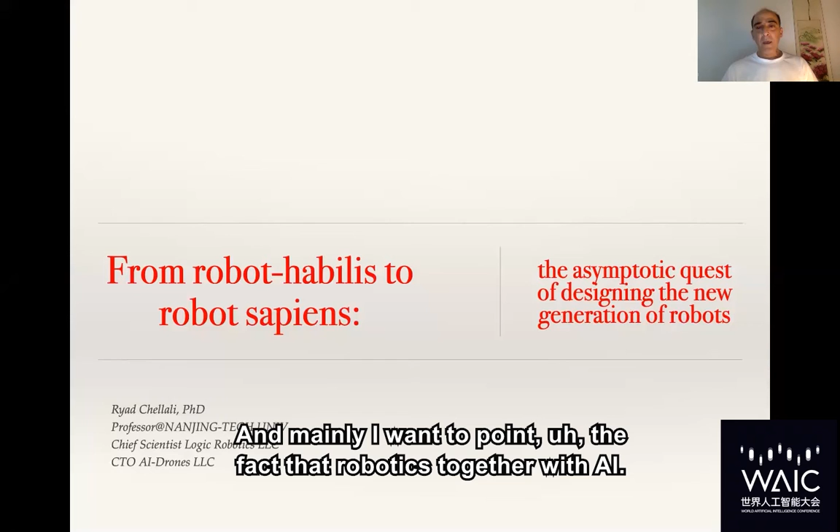Dear friends, I'm happy to be here with you, even through video. I want to share with you some ideas about robotics and AI, and mainly I want to point the fact that

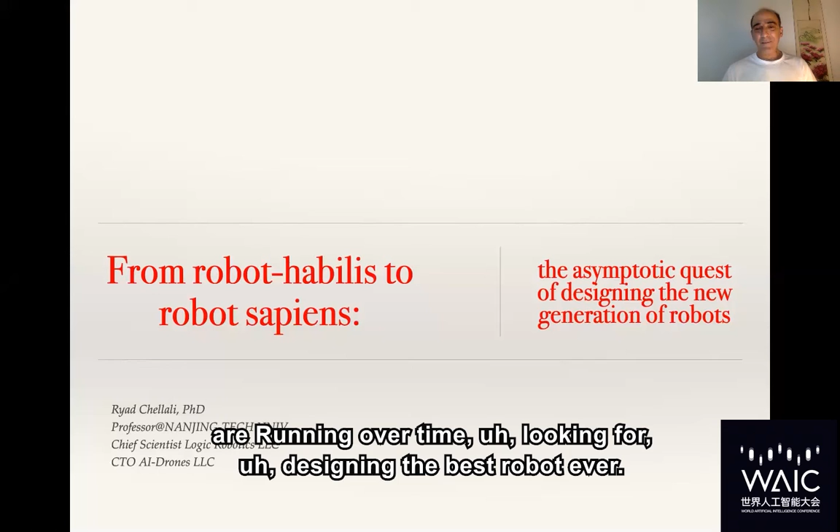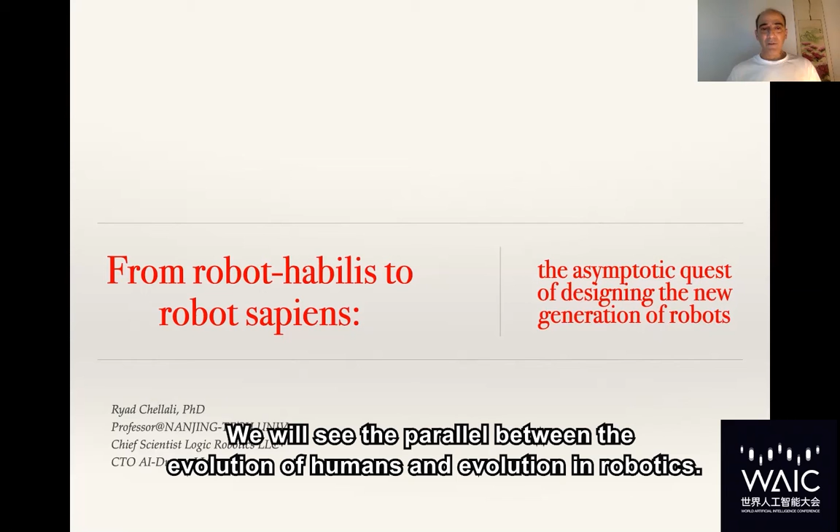robotics together with AI are running over time, looking for designing the best robot ever. And I entitled my speech from Robot-Habilis to Robot-Sapiens, and we will see the parallel between the evolution of robotics with the evolution of humans.

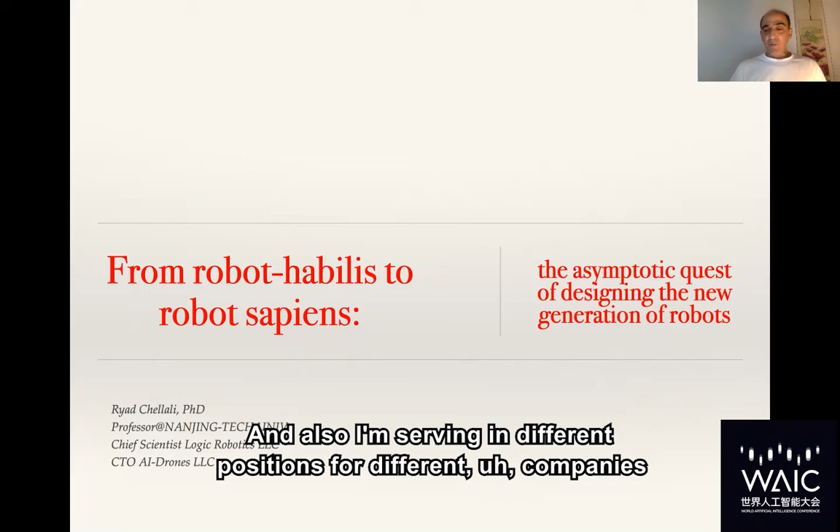My name is Ryad Chellali. I'm professor at Nanjing Tech University, and also I'm serving in different positions for different companies in China, all of them dealing with robotics and autonomous systems.

Robotics, or in other disciplines, we call this the anthropomorphism. So this is actually the quest of many roboticists. But this quest follows a very simple and basic mathematical rule or quantity called the asymptote.

The asymptote fascinated me since my young age and my first studies in mathematics combined with physics. Actually, for mathematicians, if you try to cross a street according to a series of the inverse of power 2, mathematically you never reach the other side of the street. You just cross the half, half of the half, half of the half, etc.

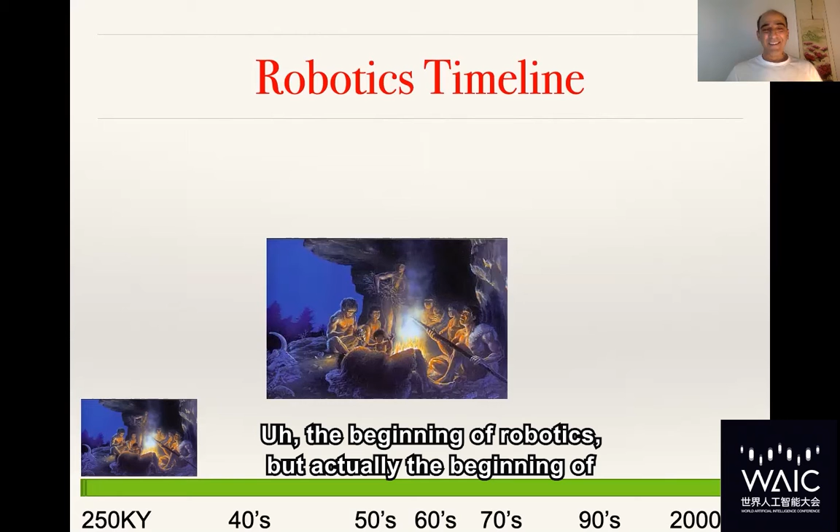If we try to follow the timeline of robotics, we will see that we are crossing indeed the street piece by piece. For me, robotics is actually the capability for humans to create a tool to do some tasks, and this is the very definition of Homo habilis. It means that the hominin, when they started creating tools, typically shaping stones to eat, that is, let's say, the beginning of robotics.

But actually, the real beginning of robotics is around the 40s, when in the US, Mr. Goertz, one of the engineers in Los Alamos in charge of putting together the atomic bomb, created a system allowing remote operation and manipulation of hazardous nuclear products. The system was very simple, purely mechanical, transmitting the movements of the operator's arm up to 3-4 meters away.

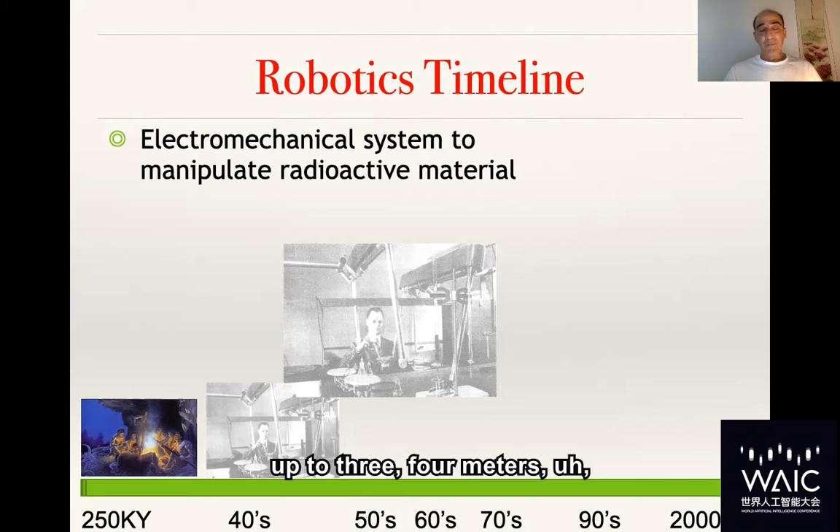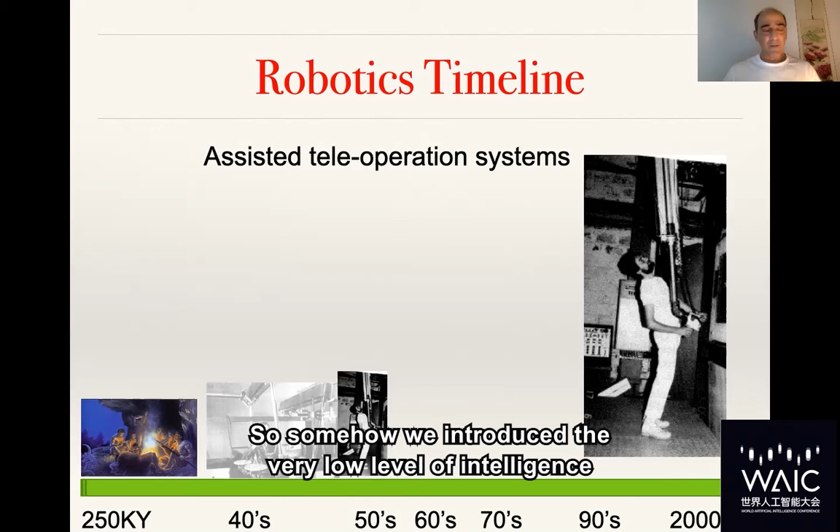In the 70s, the same system was improved by introducing external energy, so the operator no longer used muscles as the source of energy, but instead electrical motors, injecting electricity into the system as energy. More than that, some controls were introduced to ease the work of the operator. So somehow we introduced a very low level of intelligence to help the operator do manipulation tasks.

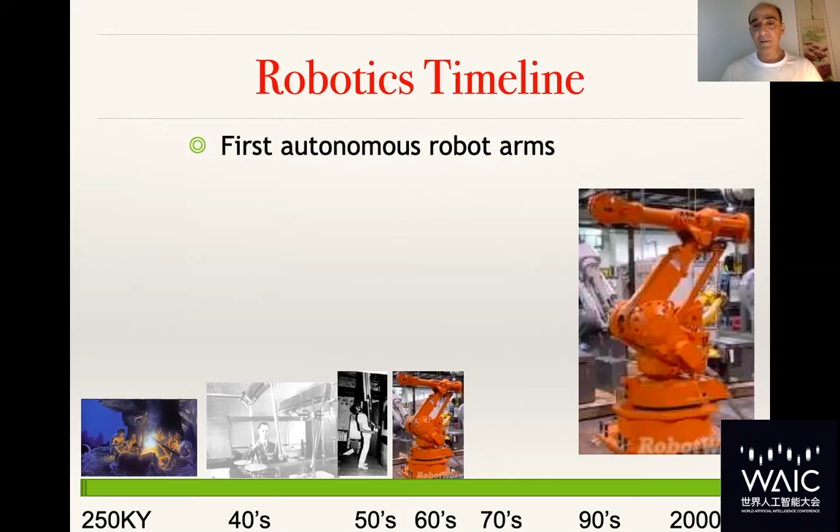If we consider the same system and remove the operator from the loop, we have the robot arm. The robot arm is exactly the derivation of the teleoperated robot we saw before. We have the same concepts, energy and low-level controls, mainly for pick-and-place tasks.

In the 70s in Stanford, the robotics team created the first mobile robot called Shakey. At that time, it was not dedicated to autonomous driving, but was used as a test bed for AI theory of that time. The idea behind it was to implement algorithms allowing the system to move autonomously by avoiding obstacles and reaching a goal, whatever the environment.

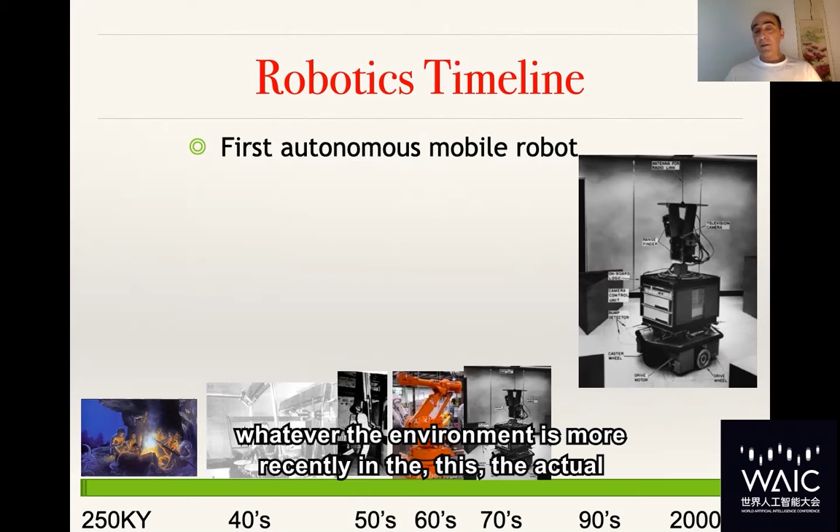More recently, in the actual trend, we are getting closer to anthropomorphism by creating what we call humanoid robots, that are somehow anthropomorphed by their biomechanical structure with arms, legs, head, neck, etc. So this is the actual trend, and the best machines these days are humanoids, and we will see why humanoids are a key point, even if we don't meet humanoids in our daily life.

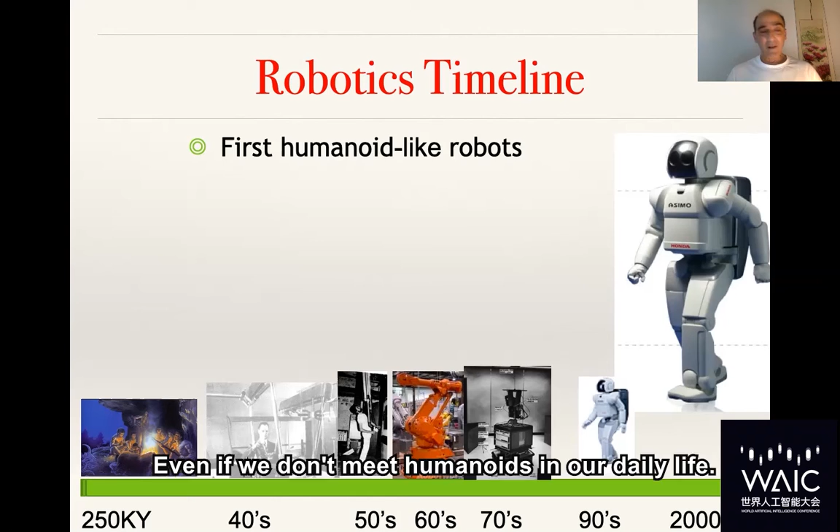So the role of robotics, and indeed the quest of Ishiguro and many others, is to create a machine that is similar to us — meaning that the machine thinks as us, looks as us, and more importantly, acts and reacts as humans.

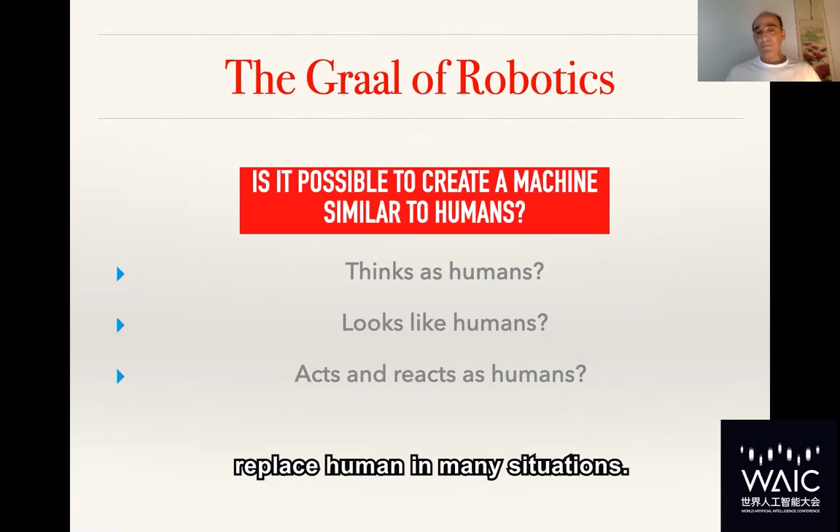This target is actually the holy grail, because if we have a machine that can do this kind of tasks, it can replace humans in many situations.

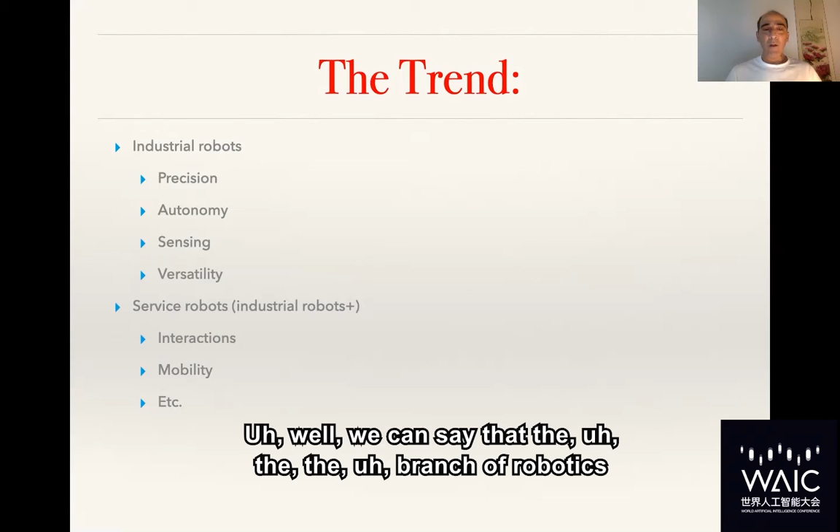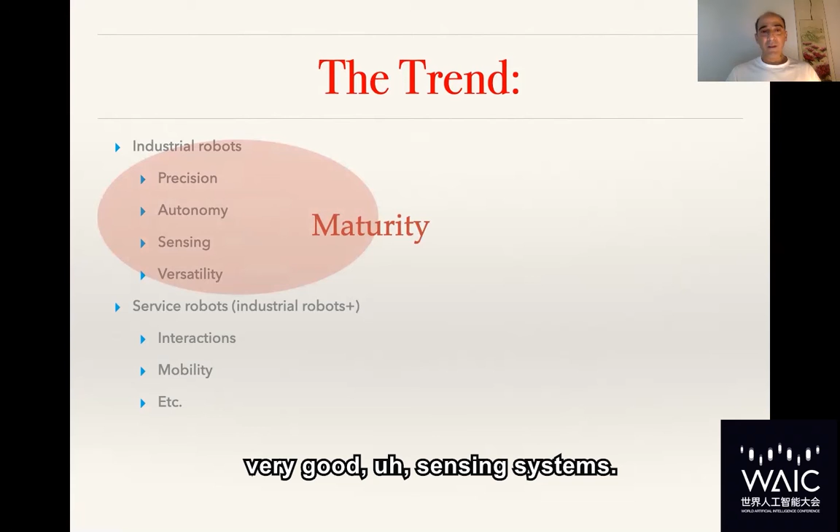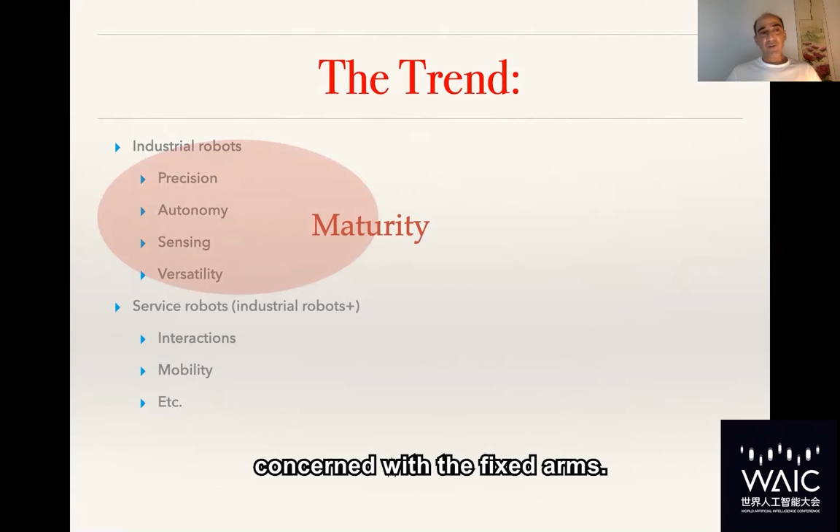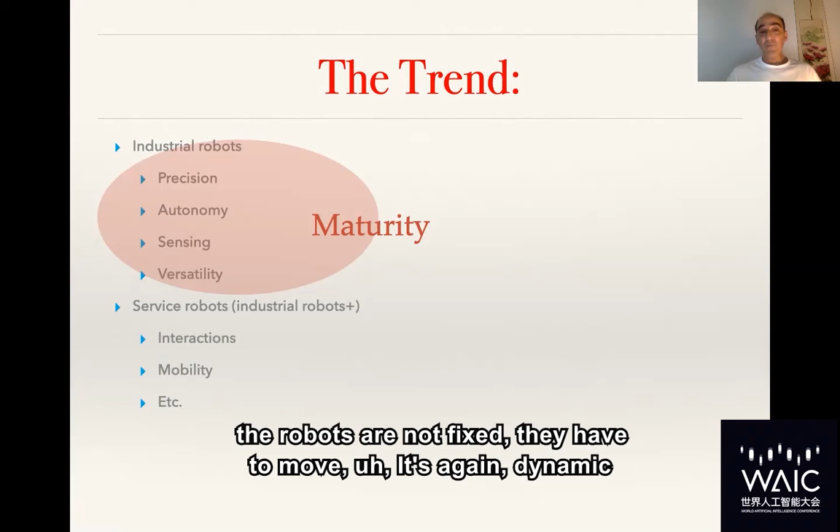Including acting, having very good sensing systems, adapting to environment change, etc. But we have to keep in mind that this branch is concerned with fixed arms. If we consider the other branch, service robotics, where robots are not fixed but have to move in dynamic and versatile environments, here we are still working on it. There's still a lot to do.

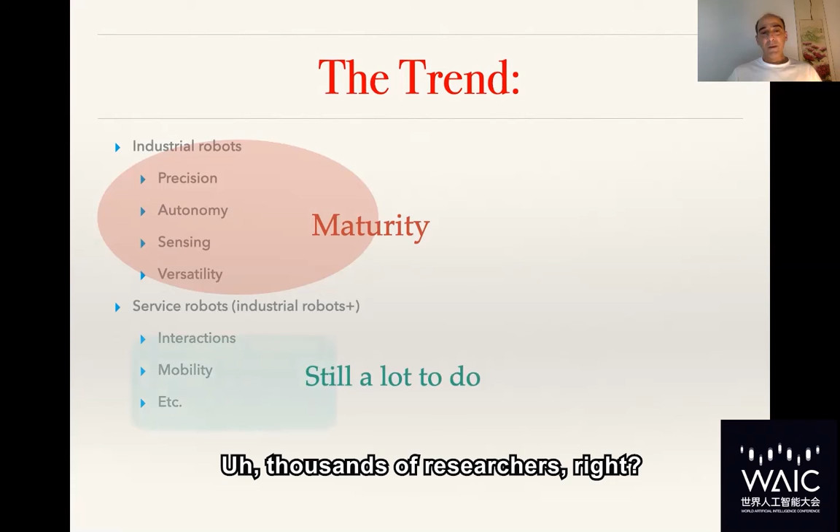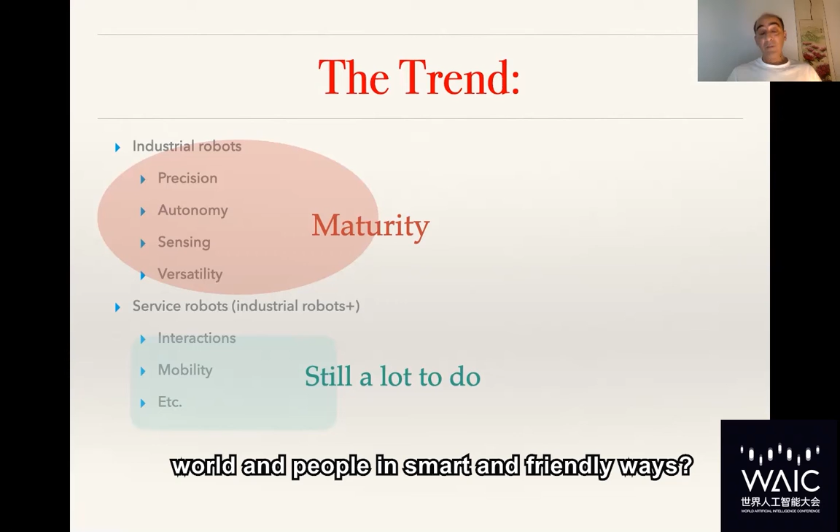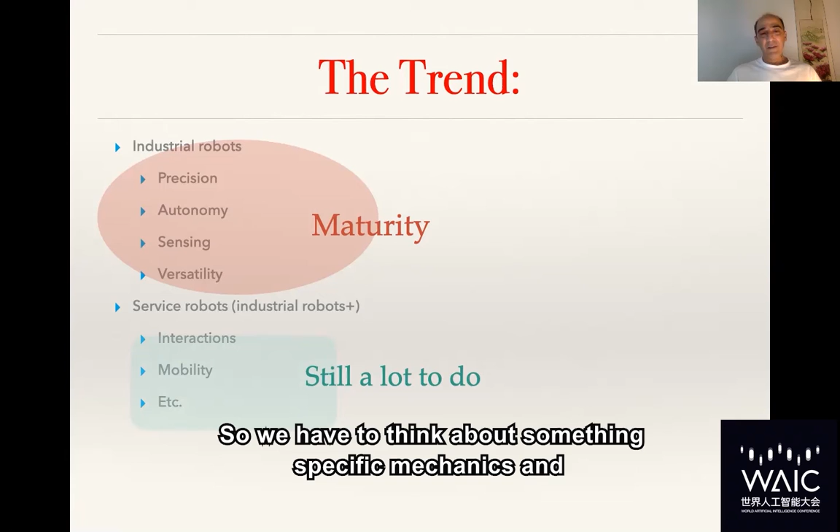The key issues thousands of researchers worldwide are addressing deal with interactions: how can the robot interact with the world and with people in a smart and friendly way. We still have some mobility problems, so we cannot send our robots into every environment. We have to think about specific mechanics or mechatronics in general to be able to send robots everywhere. These are the two main categories of issues we still have to address.

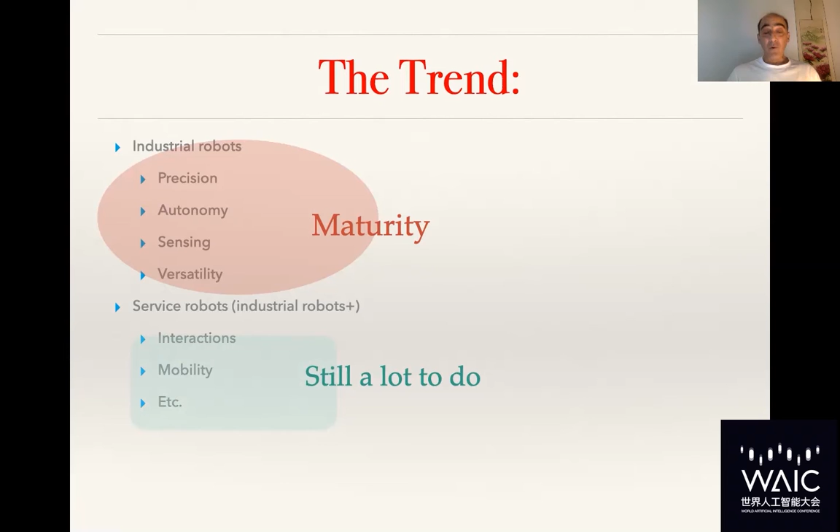Okay, let's take it in a very visual way. This is what a human can do, actually.

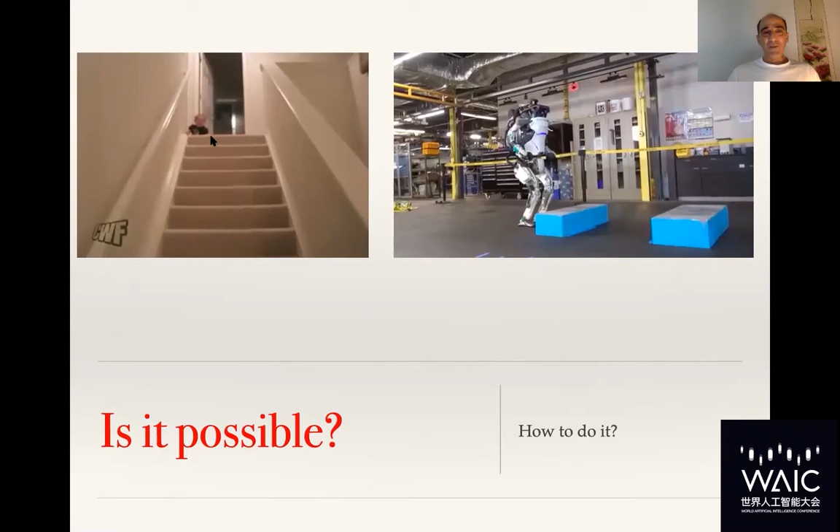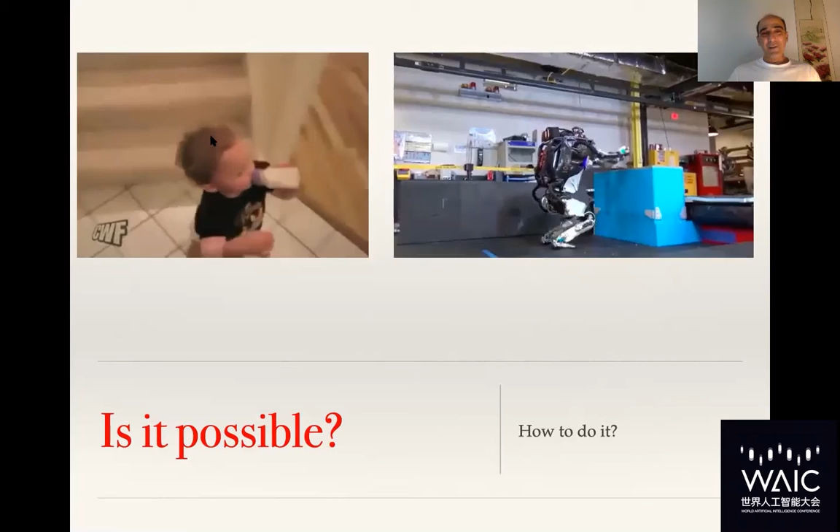If we consider the left video, we have a baby. He invented a new way to go downstairs to get his milk. Nobody taught him how to do it.

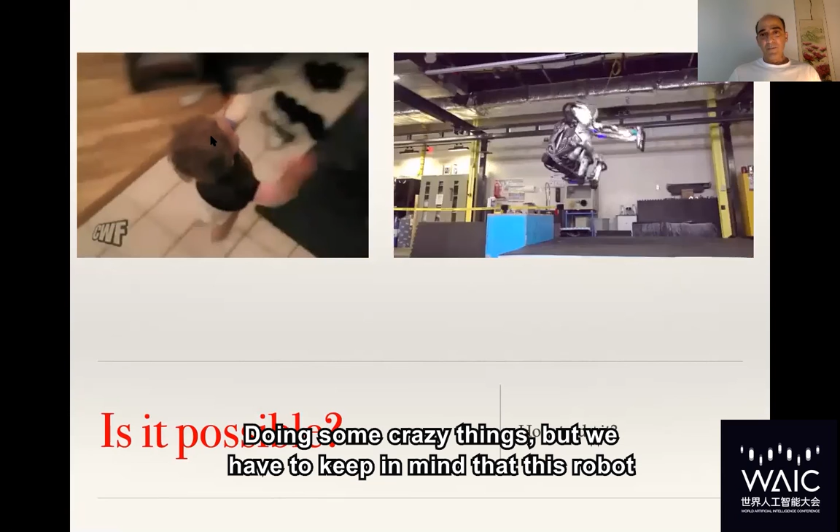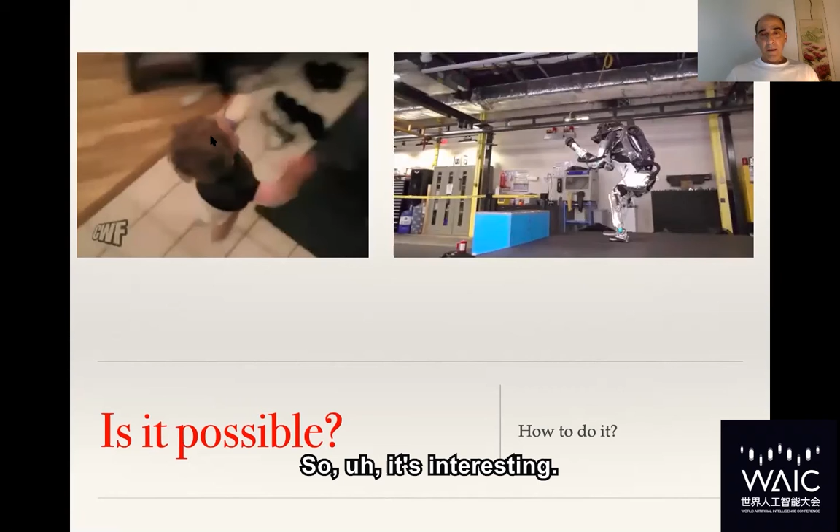On the right side, we have the state of the art in terms of anthropomorphic robots doing some crazy things, but we have to keep in mind that this robot needed tens or hundreds of millions of dollars, and hundreds of people working for more than 10 years to reach this. So yes, it's impressive, but still you can see that there's a lot to do.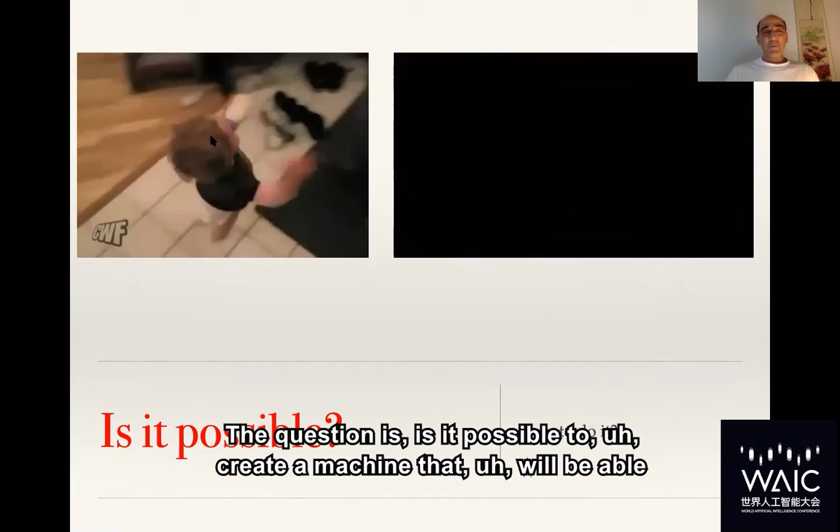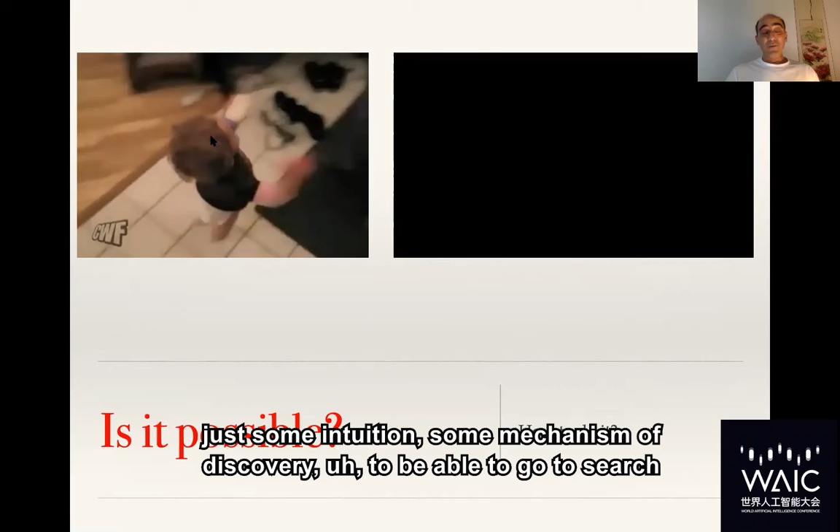The question is: is it possible to create a machine that will be able to do like the baby? Meaning, without any high-level knowledge, just some intuition, some mechanism of discovery, to be able to go search for a power plug to recharge the batteries. Is it possible? And if yes, how to do it?

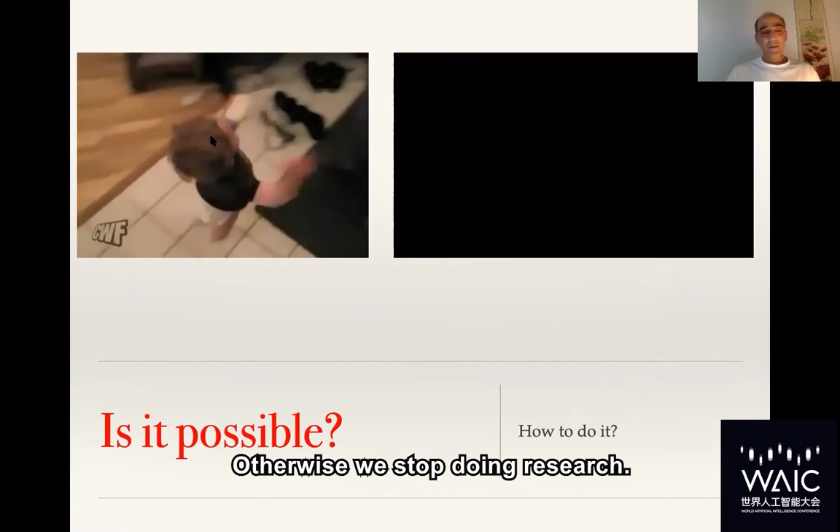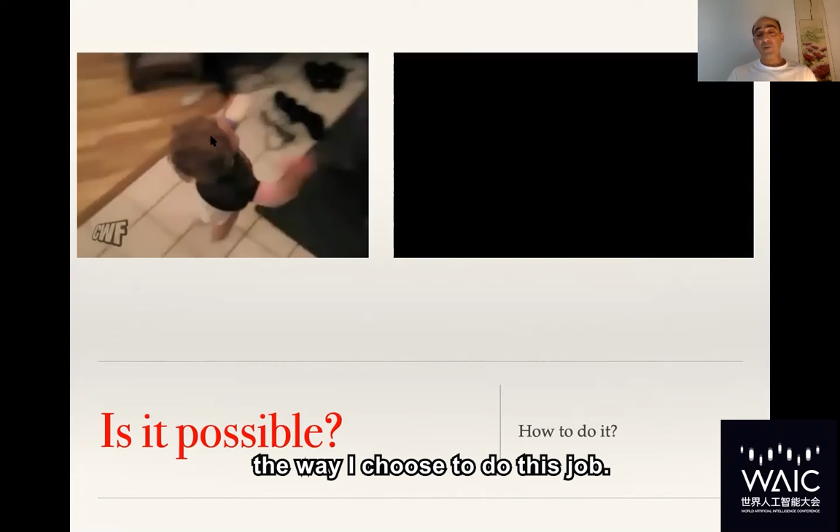I tried to answer this question. I will not say it's 100% possible, otherwise I will stop doing research. So I'm optimistic, and I was optimistic and still optimistic, and actually I created a research team targeting this. This is one of the ways I will share with you, the way I choose to do this job.

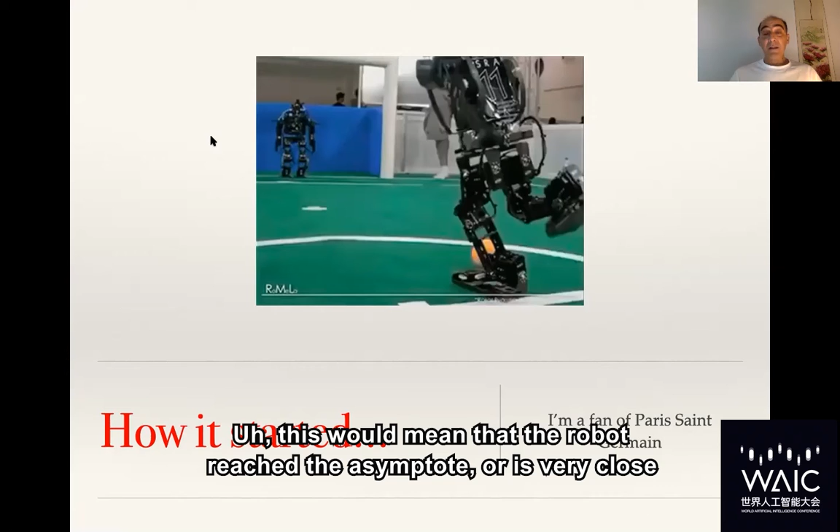Before going further, the core idea I had in mind is that if we can interact with a robot in a very natural way, this would mean that the robot has reached the asymptote, or very close to it. It means that our goal to have a machine that reacts like a human is not that far.

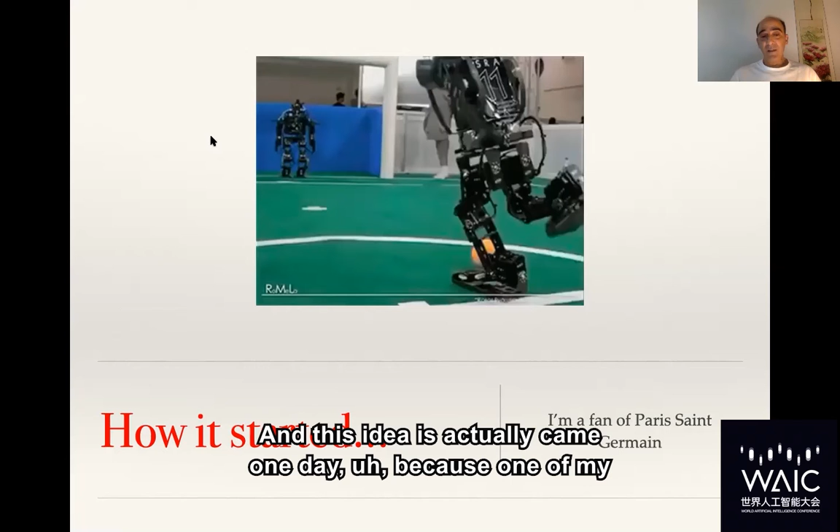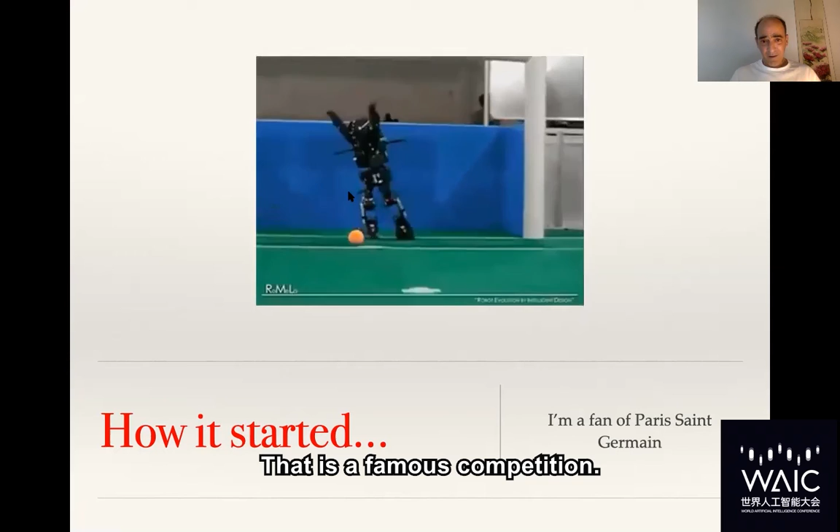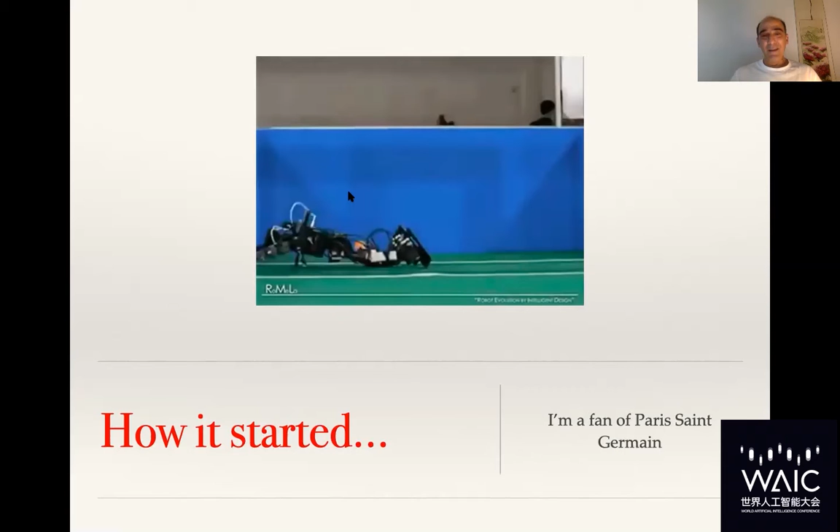And this idea actually came one day because one of my friends showed me this video. It's about soccer RoboCup, a famous competition that runs every year, where you have robot soccer teams competing like soccer players. I will replay it once again, because when I saw the goalkeeper doing this, I was laughing.

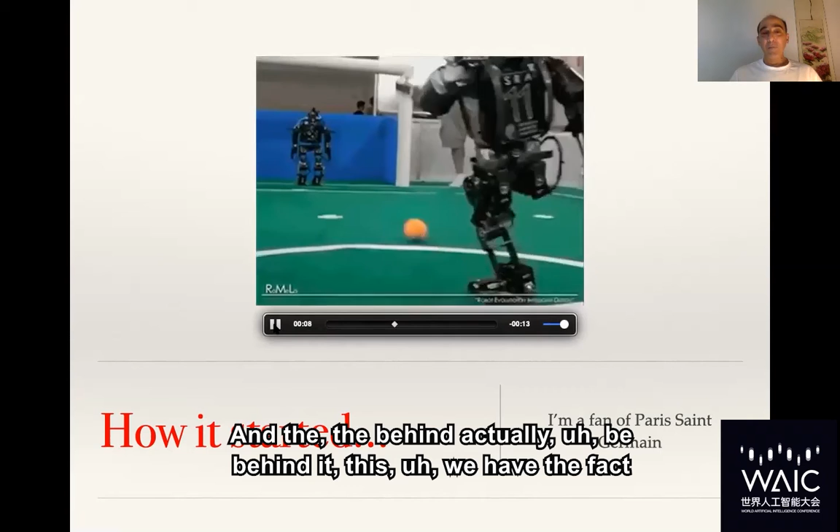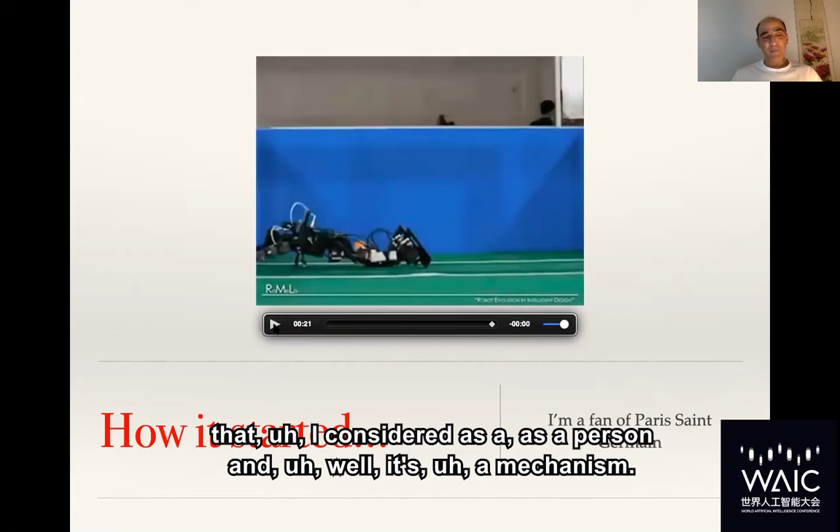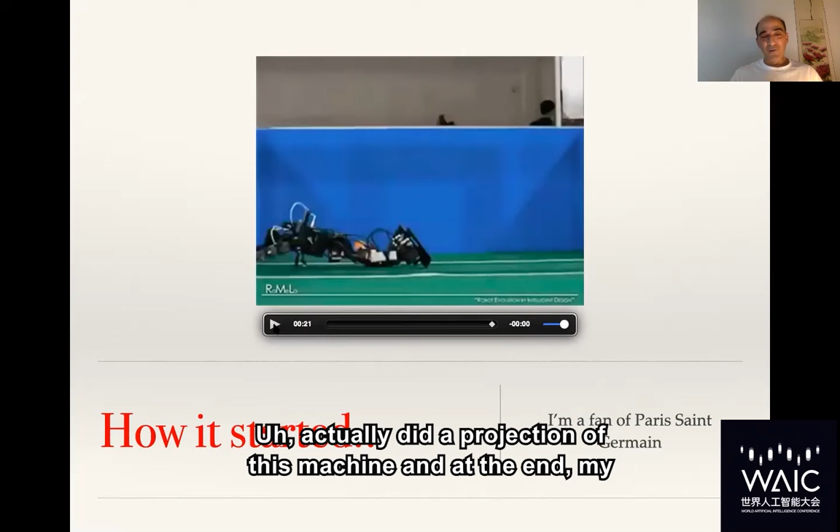And I asked myself, why am I laughing? Behind this, actually, I have the fact that I was empathic with the robot. I considered it as a person, and well, it's a mechanism, it's not a person actually, but my brain did a projection on this machine, and at the end my brain accepted it as a little boy playing soccer and doing exactly the same silly things in play.

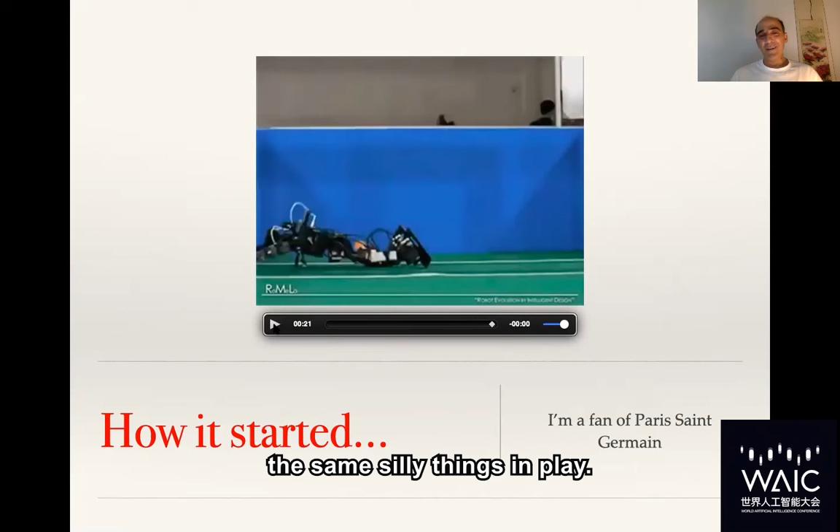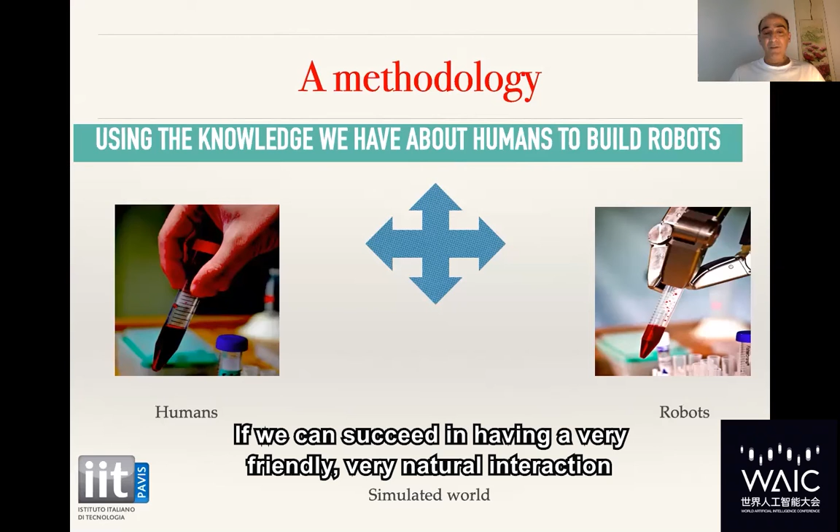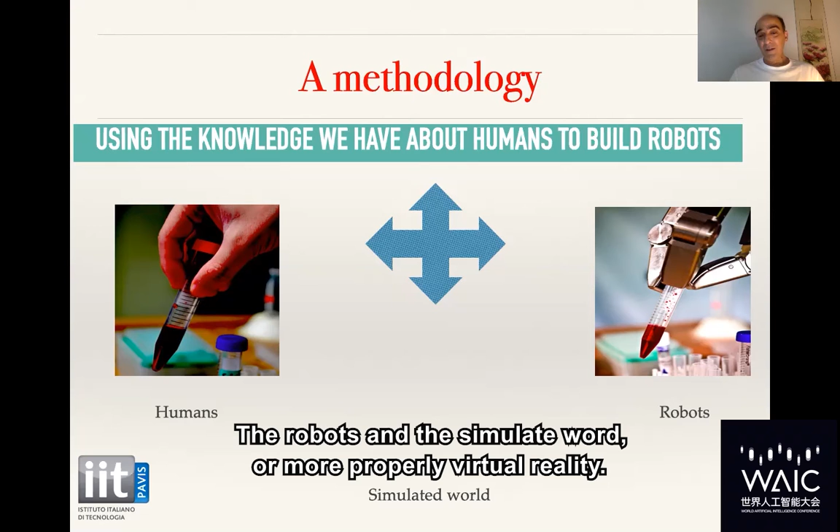Following that, I drew up a project with a very basic methodology. The core research I tried to perform deals with robot-human interaction, because for me it's the key. If we can succeed in having a very friendly, very natural interaction with robots, it means that we have a good machine. To do this, I tried to mix three worlds: humans, robots, and the simulated world, or more properly, virtual reality.

And this is the crash test: if the robot can pass the Turing test, meaning if the robot is accepted exactly as a human, that means we've reached the other side of the street, and we have our anthropomorphic robot.

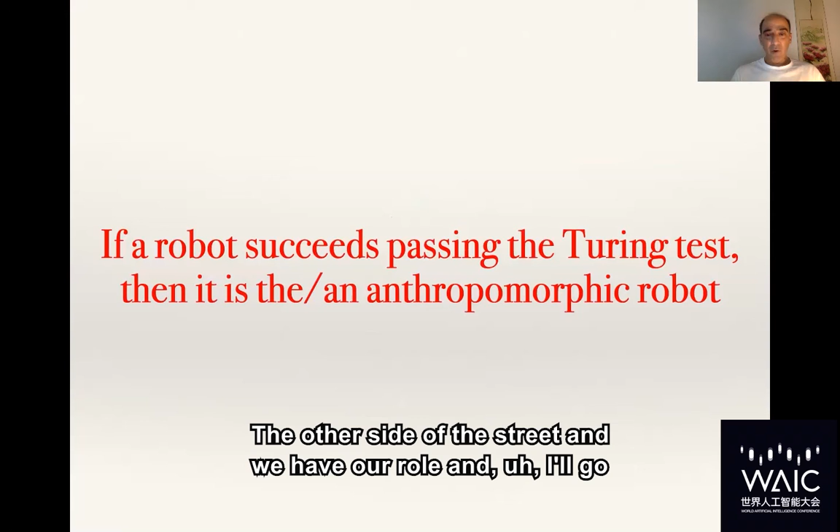I'll go quickly to state the problem in terms of equations. To summarize, we can master the mechanisms, the robots, the controls, the algorithms, etc. But we cannot master the human. The human is the big problem. Or let's say, let's be honest, it's the big question, not the problem.

We have to consider the two facets of humans. We have the human as a set of sensors, this is to capture information from outside. And we have the human control, meaning he or she is generating commands or controls to change the state of the world. So if we put the human with a robot, most of the questions we have to answer are about the human sensor and the human controller.

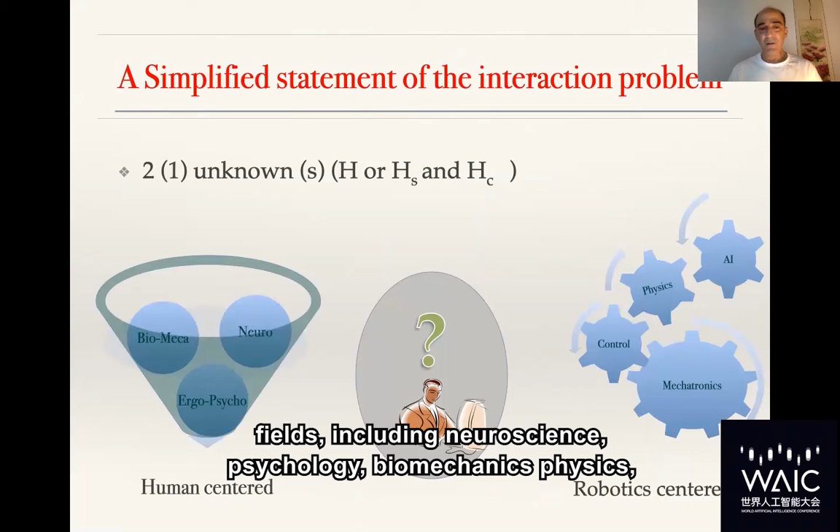This is a very, very tough task because it's not just an engineering problem, it's a transversal problem which needs the collaboration of different fields, including neuroscience, psychology, biomechanics, physics, mechatronics, AI, etc. So as you can see, AI is part of the story, but this importance is actually at the same level as other topics.

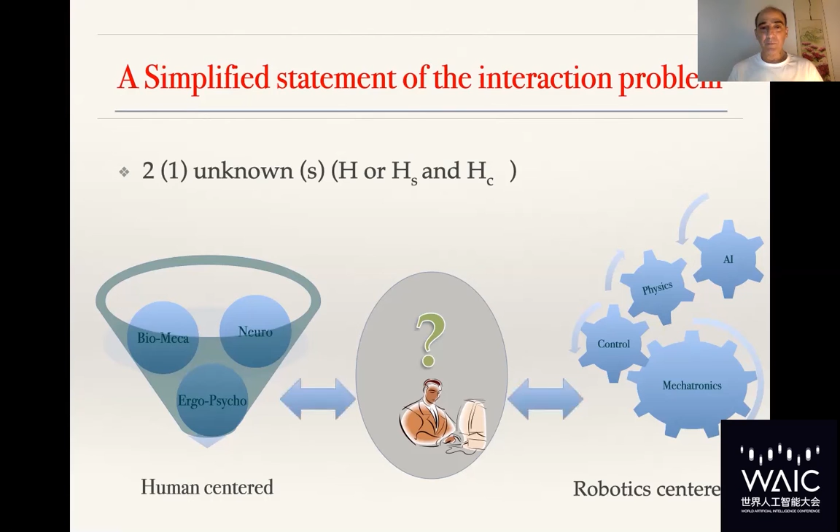As I said before, when I saw the goalkeeper falling down in a silly way, the first idea that came to my mind was, what about empathy? I was empathetic with the robot, and this is a key characteristic in a human-human relationship. If we are empathetic with people, we can establish with them social relationships or at least some social interactions.

When we dig a little bit more, we see actually the same theory in psychology, called the perspective taking, which deals with the perspective taking, the psychology part of the story. Actually, if we can put ourselves in the place of others, then we can establish with them social relationships.

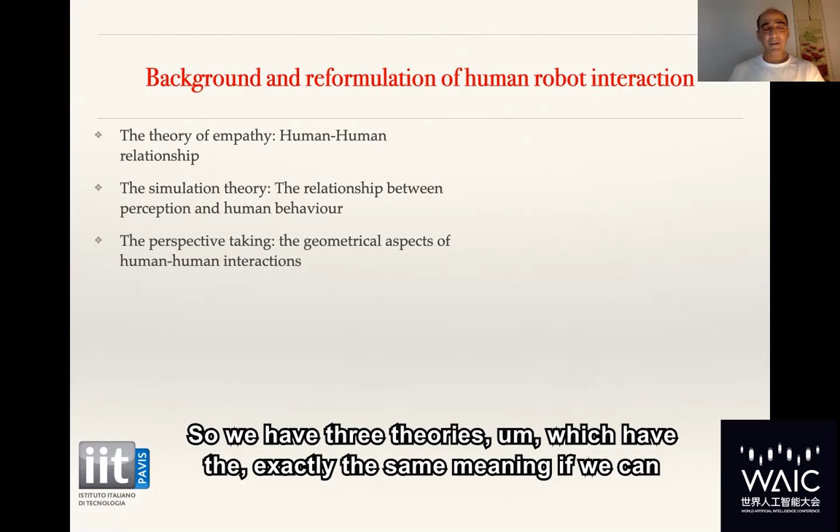And if we consider empathy, it's absolutely the same thing. In neuroscience, there's what we call the simulation theory - this is very basic neuroscience. If we can simulate the actions and reactions of others, it means we can predict the reactions of others, then we can establish with them social relationships. So we have three theories which have exactly the same meaning if we consider human-robot interactions.

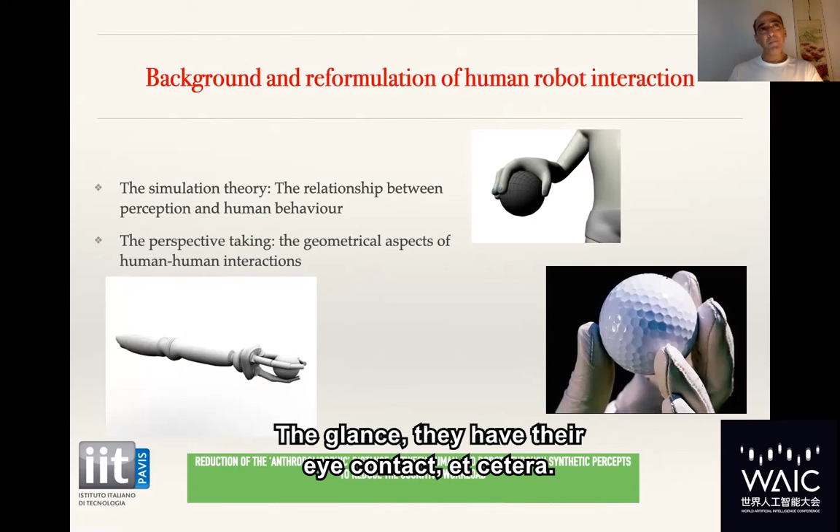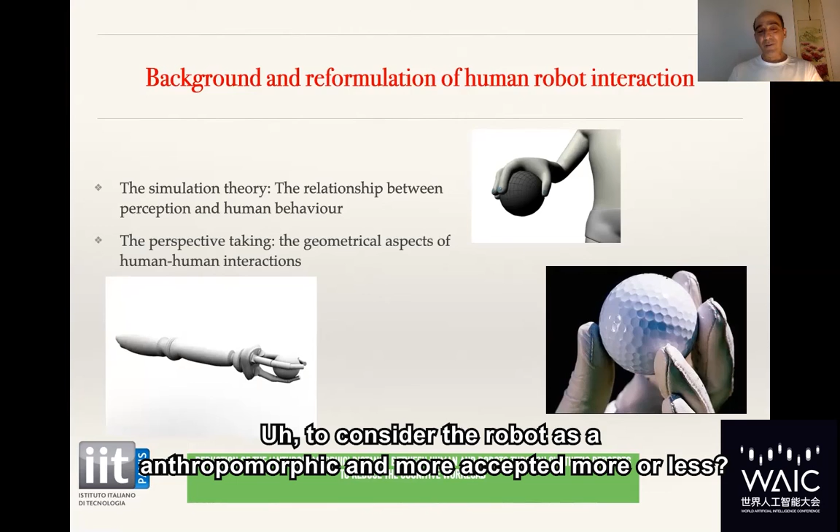Following this, I introduced the concept of what I call the anthropomorphic distance - meaning how far the robot can be from a human in terms of shape, in terms of reasoning, even in terms of the sound produced by the robot, or the glance, the eye contact, etc. What is the acceptable distance for a human to consider the robot as, let's say, anthropomorphic, accepted as more or less real? This was my big question.

Sensory substitution was introduced because we know that our senses are not complete. So in some situations, we have to replace some senses with others - like if we are in a dark room, we will use our ears and our tactile sense to discover the shape of the room and to avoid obstacles, etc. Following this structure, I ran different projects, ranging from basic research to very applied research, and I will give you some hints about some of these projects.

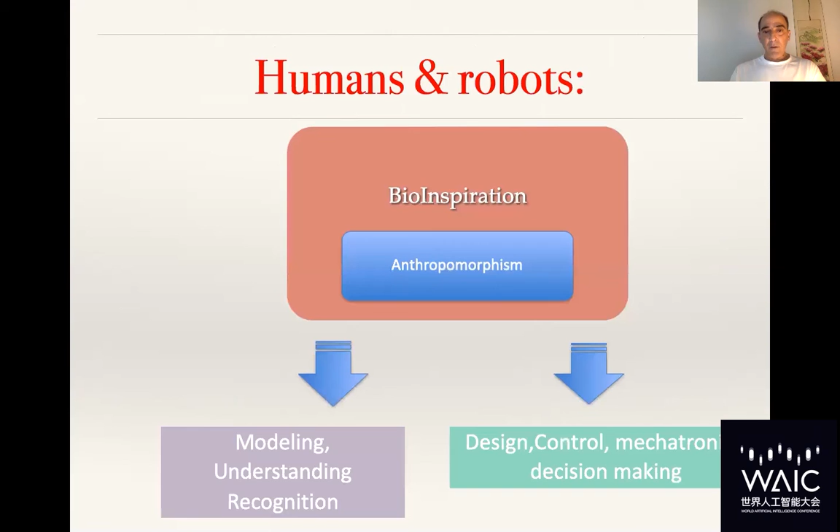Let's move to the examples directly to save time. As I told you, the question of the anthropomorphic distance is a key point for me. We performed some experiments with colleagues from Germany to see if the shape of the robot has an effect on our consideration of the robot.

We ran a very simple experiment where we compared the reaction time of an observer - one observing a cartoon hand which is close to the human shape, and the pure mechanical hand meaning we have just the joints - when performing a physical task and a pure perception task. The fascinating result we had is that the closer the shape is to the real human hand, the more we accept, actually we have some empathy, to the machine.

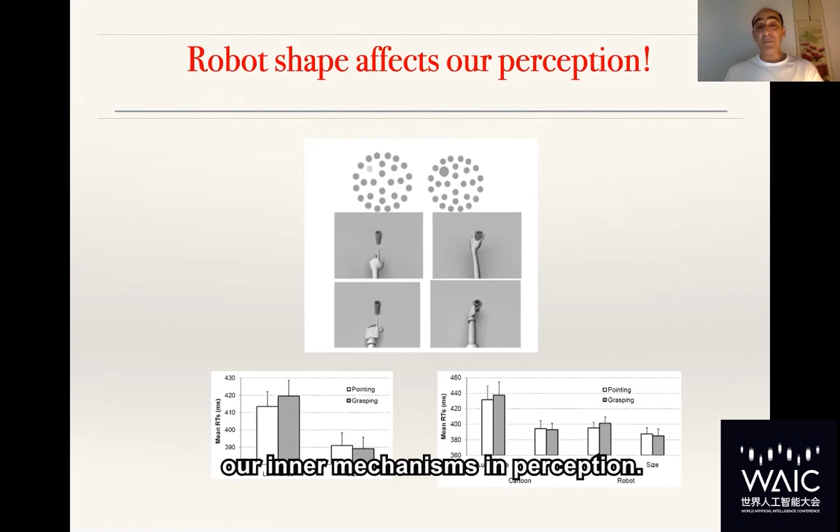This means that the shape of the robot not only affects our general perception of the robot, but also affects our inner mechanisms in perception.

Here I will introduce another project dealing with vision and the tactile sense. The question was, is it possible to replace the visual sense with the tactile sense? Typically for blind people, could lost vision be replaced with tactile sense? Could they use a fingertip to navigate in unknown environments?

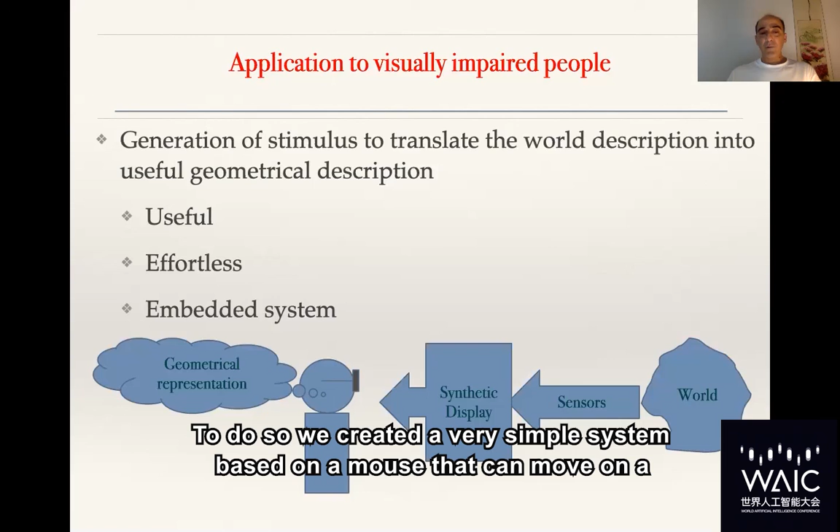To do so, we created a very simple system based on a mouse that can move on a tablet, so we can get the XY position of the hand. We replaced the left button with a stick going up and down, and the vertical movement of the stick represents the height of objects in the environment. To get the 3D map of the environment, we use a stereoscopic system that gives the depth and thus the 3D map.

We had different findings, but the most interesting was that we demonstrated that for blind people, even though their visual cortex seems useless since there's no direct connection between eyes and the visual cortex, through spatial memory and the tactile sense they actually activate the visual cortex. The tactile information acquired through the vertical movement of the stick while moving the mouse on the tablet creates not only a map of the environment but also activates mechanisms in the visual cortex related to obstacle avoidance and planning, which is a very nice result.

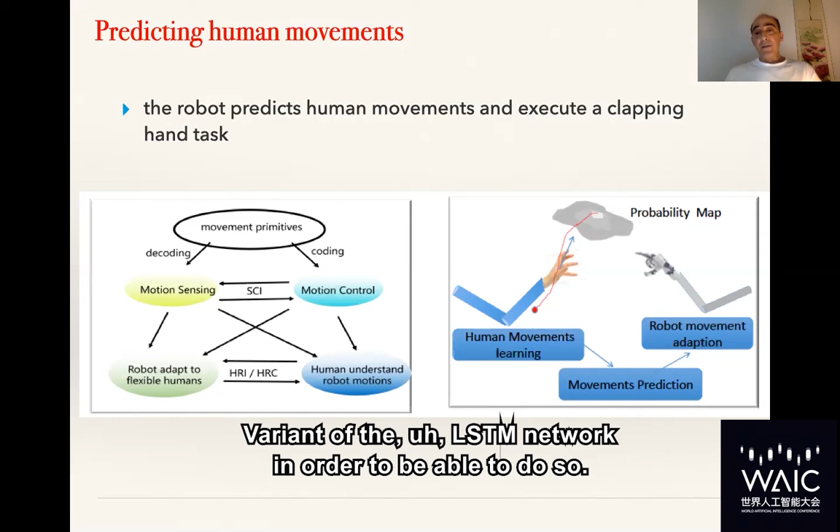We used a lot of mathematics and biomechanics to generate what we call a probability map. This is embedded in cascaded deep networks, and also some time-series dedicated networks—a variant of the LSTM network—in order to be able to do so.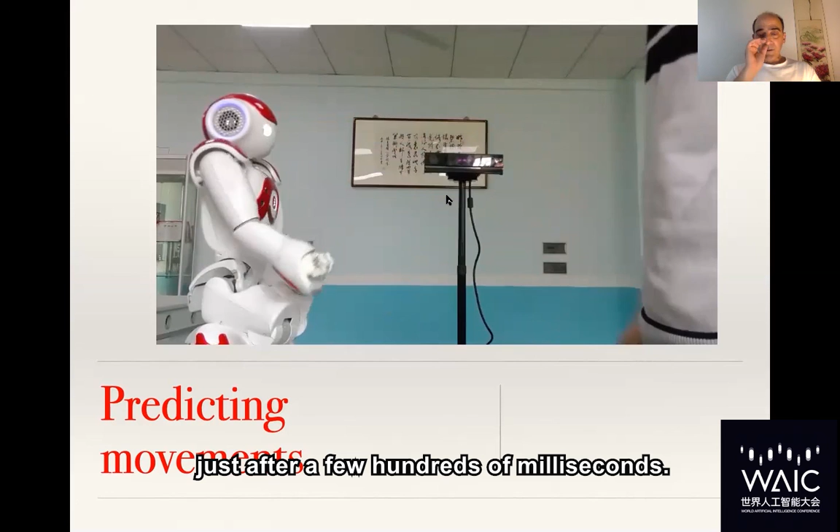And the results are very interesting. Here I just show a small video. You can see that the robot starts the movement just a few hundred milliseconds after the movement of the human, and the position is almost perfect.

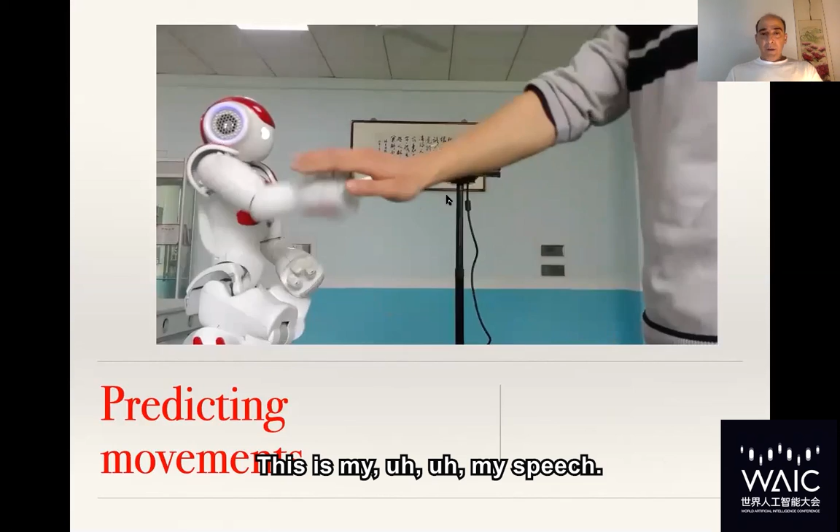This is my speech. I didn't focus a lot on AI per se, but I tried to give some hints about the trends of robotics, and indirectly showed the needs in terms of AI—the basic tools in AI to develop properly for robotics. I showed at the end some pure AI development dedicated to robotics. It's very simple, too simple actually to let us pretend that we will reach the anthropomorphic robot very soon. But the trend is there, and the works are there, and the people are there.

So I think, and I'm pretty sure, that we will have numerous breakthrough results in the coming months or years, allowing us to reach the holy grail of robotics. Thank you for listening.